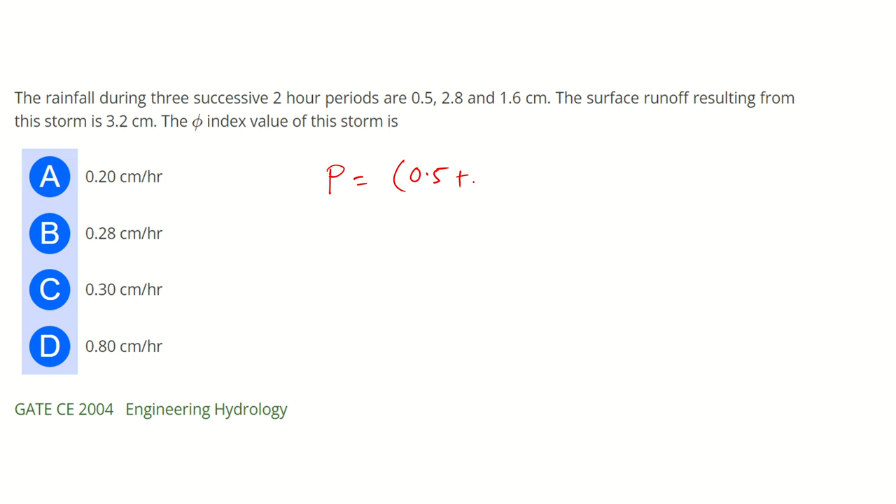So what is the total precipitation? Total precipitation is equal to 0.5 plus 2.8 plus 1.6. Okay, that means 4.9 सेंटीमीटर. और ड्यूरेशन क्या है आपका? ड्यूरेशन इज ये है 3 successive 2-hour periods. मतलब this rainfall is for 2 hours, 2 hours, 2 hours. It means 6 hours.

Then your surface runoff is given to you. So surface runoff R is equal to 3.2 centimeter. Okay. You have to calculate the phi index. Phi index का वैल्यू जो है हमें कैलकुलेट करनी है. So what is phi index? Phi index is equal to P minus R divided by TE. Precipitation minus runoff divided by duration of effective rainfall. ठीक है?

So it will be 4.9 minus 3.2 divided by 6 for the first trial. ठीक है? जिसमें आपका वैल्यू होगा 0.28. ठीक है? Now अब यहाँ पे अगर हम लोग चेक करेंगे तो फर्स्ट जो रेनफॉल है दिस पीरियड, इसका

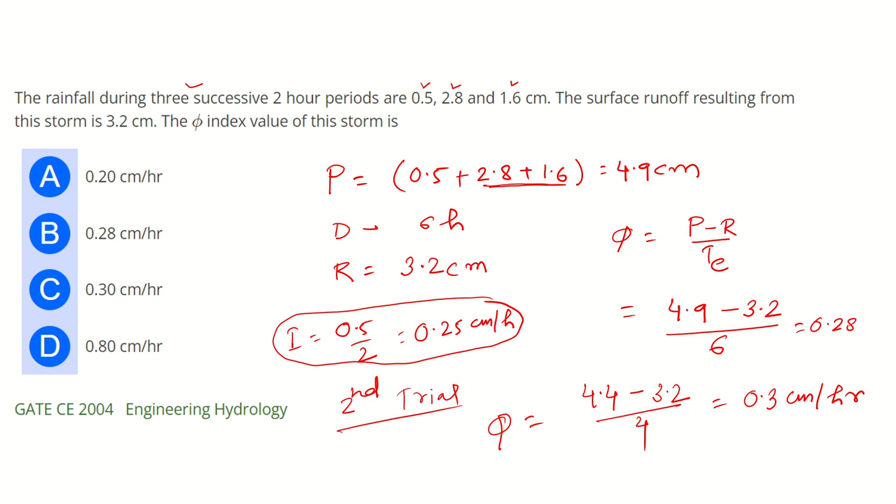Okay, so what will be the value of phi? Phi is equal to now effective precipitation. That means ये दो है सिर्फ, क्योंकि इस ड्यूरेशन में आपका कोई रन ऑफ नहीं होगा. Right, so that will be 4.4 minus रन ऑफ, that is same 3.2, divided by duration, which is now your 4 hours. ठीक है, so 1.2 divided by 4 is 0.3 centimeter per hour. 0.3 centimeter per hour, option C.

Next question. The average rainfall for a 3-hour long duration storm is 2.7 centimeter and loss rate is 0.3 centimeter per hour. Flood hydrograph has a base flow of 20 meter cube and produces a peak flow of 210 meter cube per second. The peak of 3-hour unit hydrograph is? तो आपको यहाँ पे फ्लड हाइड्रोग्राफ का डिटेल दिया हुआ है. You have to calculate the unit hydrograph.

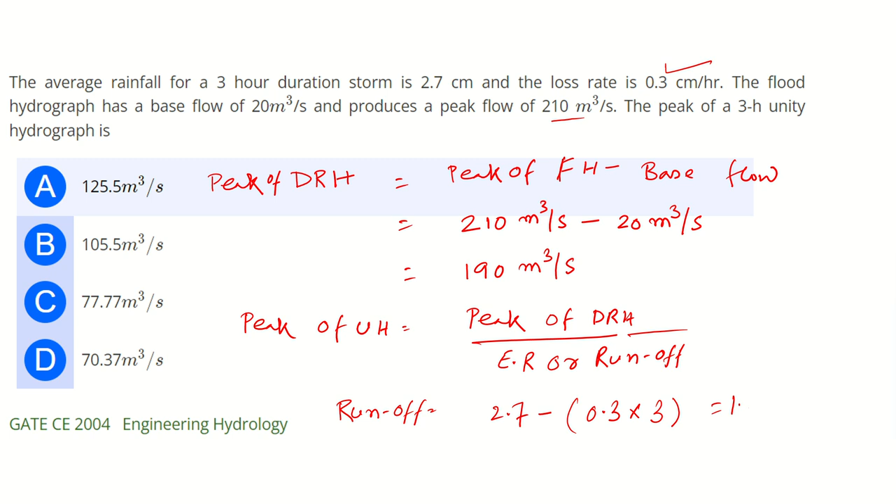That is equal to 190 divided by 1.8, which is equal to 105.5 meter cube per second. Option B.

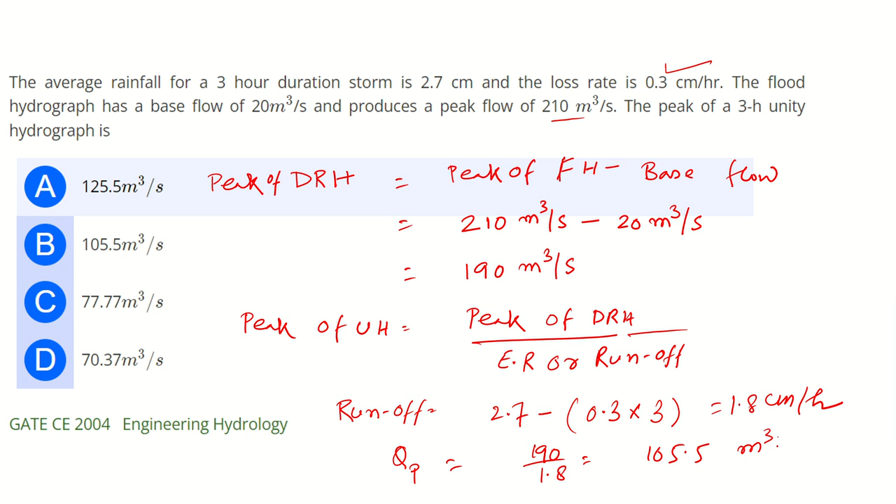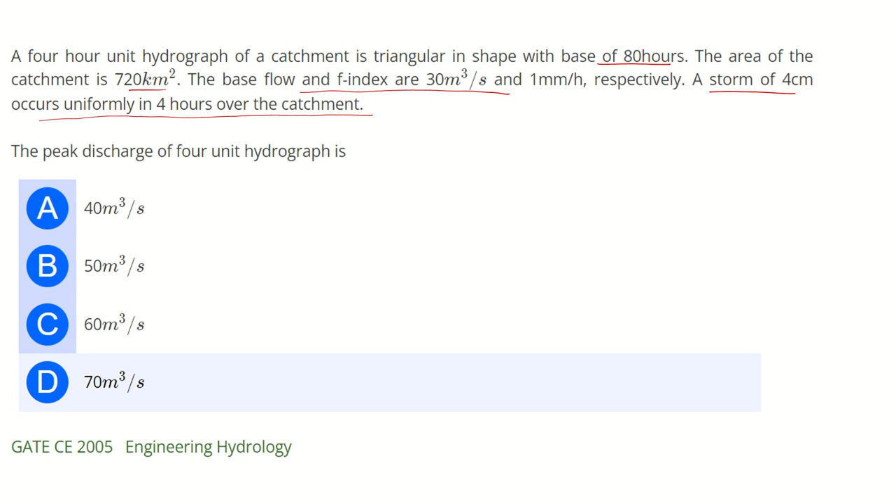Next, a 4-hour unit hydrograph is given, which is triangular in shape with a base of 80 hours. Similar problem we have previously solved. So unit hydrograph, the base is given, area of the catchment is given, base flow, phi index is given. A storm of 4 centimeter occurs uniformly in the 4 hours over the catchment. The peak discharge of the 4-hour unit hydrograph. So what is the peak discharge of unit hydrograph?

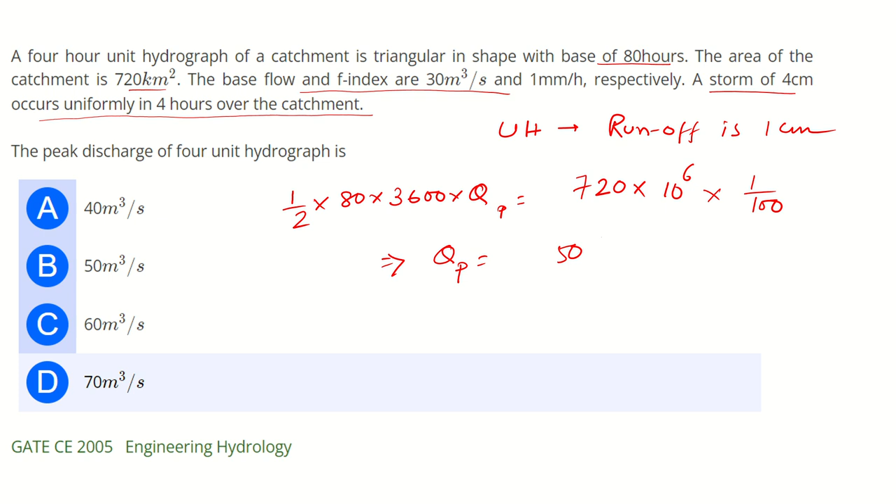So we know the area of the unit hydrograph, that means 80 into 3600 into Q peak, that is equal to what? Runoff volume. What is the runoff volume? For unit hydrograph, runoff is equal to 1 centimeter. So the runoff volume will be 720 kilometers squared converted into meter squared, multiplied by 1 centimeter, 1 divided by 100, converting into meter. So if you solve this, your Q peak will be equal to 50. So this will be option number B.

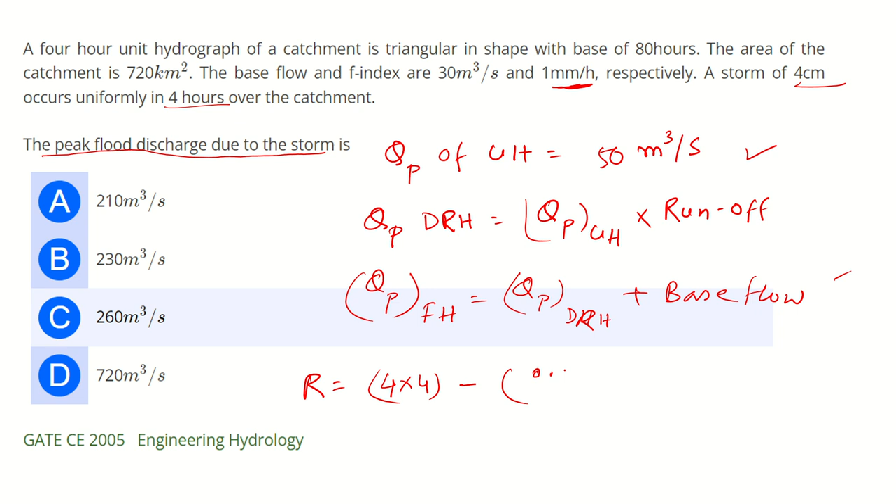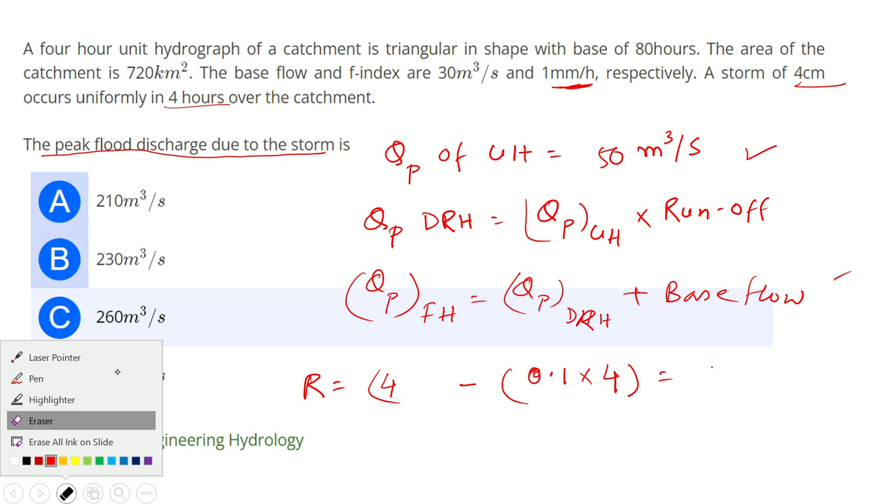What is the duration of rainfall? 4 hours. So it will be 3 point, oh sorry, total 4 hour rainfall has happened, so it will be 4 only. 4 centimeter rainfall has happened in 4 hours minus 0.1 multiplied by 4. That means 3.6 centimeter.

Okay, so what is the Q peak of DRH now? Q peak of DRH is equal to 50 multiplied by 3.6, which is equal to 180 meter cube per second. What is the Q peak of flood hydrograph then? 180 plus base flow. How much is base flow? 30. 210 meter cube per second. Option number A.